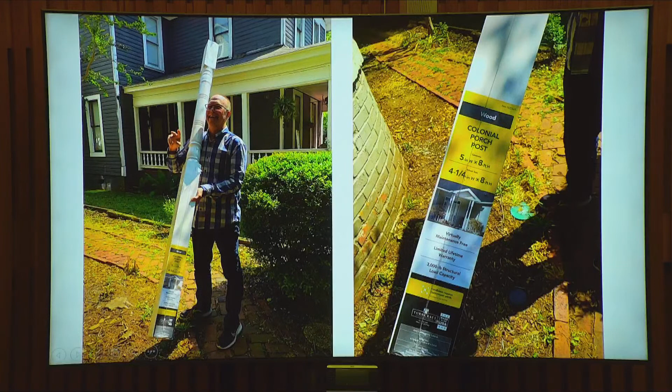You'll notice that the dimensions on these are going to be taller because of code, since porch railing heights are higher now. So on the older ones, the turning will start close to 28 to 30 inches, because that's where historically you would have your railing placed. And you'll see on the newer one, there's a lot more height here before it becomes turned. That's because when a new railing goes in on that second floor, it's going to be taller.

Front elevation porch columns.

Under findings, Mr. Pitzel had ordered new siding to match the exact siding that was on the house. Some of the porch columns on the residence, at the time work started, were fiberglass, so he had a mix of wood and fiberglass on his porch to begin with.

The commission has approved synthetic columns to replace severely damaged wood columns in the past, most recently at 714 Line. Columns where just the bases were damaged have traditionally had new bases built and inserted.

On the porch banisters and hand railings, the front porch railing was at the standard 28-inch height, which is what you find with historic railings. The new railing is 34.5 inches. The owner has stated he wants a taller railing because the historic railing does not meet code.

I talked to the head building inspector for the city to determine what was appropriate. He said because it's a historic building, he could put back the low 28-inch railing if he liked. If he wanted a taller railing, code is actually not what Mr. Pitzel built, which is 34.5. Code is 36, so the new railing built is too low to currently meet required code for new construction, and Mr. Pitzel is aware of that.

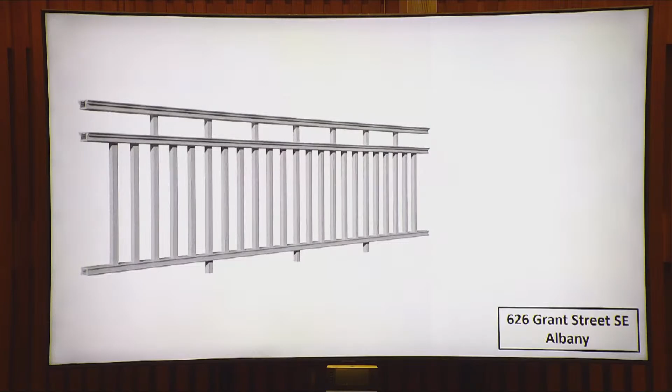So I would suggest, for clarity on this, breaking these COAs down into each individual component.

And we're going to start with the siding. So does the commission have any questions on that? Mr. Pitzel is here, so we'll have him come up front if you have questions for him.

Good afternoon, I'm Wendell Pitzel at 626 Grant. This is actually going to be my third COA. The first one was for the rain gutters, because I had water damage from lack of rain gutters, which is why the siding was so bad around the bottom of the house.

Caroline, have you seen the new siding? Does it match? Well, I don't know what was originally there. Oh, well, that would be this—okay, yeah, this is a sample of it. It has galvanized corkscrew-type nails, which I believe are probably a little bit more modern, but this was the siding that came off the house. I brought you a piece in case you need to see it. Do you want to go ahead and pass that down?

Absolutely, can you just send it down? We know it's gonna end with Bill because he's gonna want to look at it the longest. Yep, again, if you don't want to keep it for a souvenir. I might keep it—I have a whole library of building cards. I brought you some nails too. Oh, you want to see this one? Yes ma'am, that's what we're gonna be approving. Thanks to Literal Lumber, we had quite the time. I guess if that's not a separate piece—it's always fun at a lumber store. Well, the guy that does the milling quit the week before they were supposed to start our job. Oh sure, it was delay on delay.

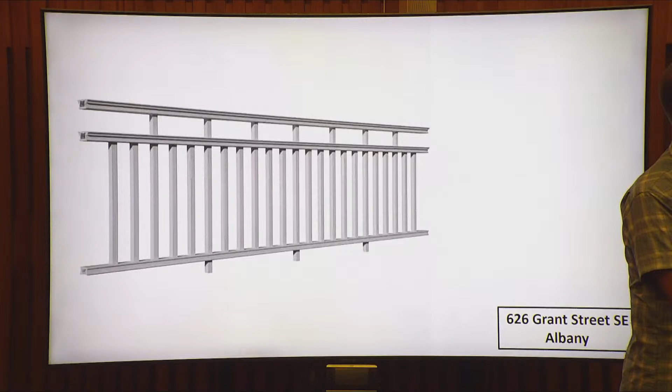Now, so, I would be comfortable with the 36-inch height, but with the more open at the top.

It doesn't have to meet exactly what we've approved in the past. There could be some discussion on design for that, but with the more open design, you could get the separation between 28 and 36. If we brought it up from the bottom, say of the spindles, so instead of putting it on top, if we raised the spindles up and put that piece underneath where it wouldn't be visible from the street, to raise it up to the 36.

You're talking about the whole thing coming up? No ma'am, I'm talking at the bottom of the image. You see where the supports are right there in the middle? Right, so that's basically a 2x4 at the bottom of my spindles. If I were to pull those spindles off, raise it up an additional 1.5 inches to get it to 36, and then put the spindles on top of that, you wouldn't see the bottom board from the street because of all the landscaping as it is.

It would raise that top railing up to the 36 inch, meeting my desire for a 36 inch safe rail for myself and my grandkids and visitors. And then, of course, putting the strip along for the 28 inch so that you could see where the historic side height would have been.

I want to make sure I've got this in my notes correct. So you're talking about taking the entire railing panel and just slowly shifting it up. There is a maximum space that has to be under that.

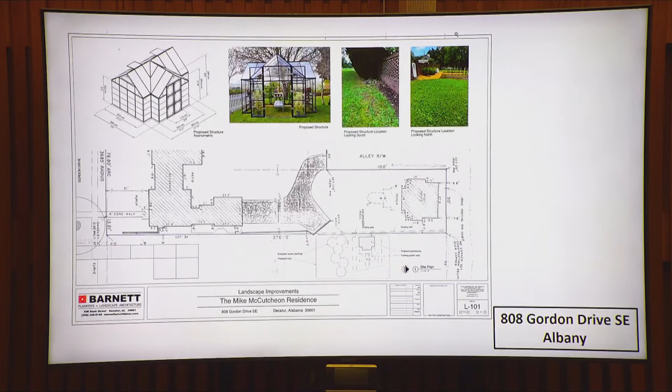I can make a motion that the greenhouse is accepted with the screening and landscaping as shown. Do you have a second? Second. All in favor? Aye. All right, I will let them know that it's been approved.

Next up is not a COA, it is a courtesy review for new construction. So typically with large additions and new constructions, we have the builder and the property owner meet with the commission just for level setting on expectations so that they're not burning a lot of design hours without understanding the standards for the district.

This is for a vacant lot on Jackson Street. We don't have many vacant lots in the district. It's on the corner of Jackson and Fourth. There is no address yet because there's no house there, so that's why I don't have an address on the paperwork. So this is the lot as standing on the sidewalks. Oops, and I have Grant Street on there, my apologies.

And they did have initial drawings prepared for what they were sort of proposing. This is a 1.5-story craftsman style building. And that is the front elevation. So I'm going to come back to this and I'll read.

So this is the courtesy review that they're requesting, per Decatur's Design Review Standards for new construction, section 19. And I put a copy of the full guidelines in your packet because it's quite lengthy. For height, it is asking that the height of the building meet those adjacent and neighboring to it.

And you can see all the buildings down the street are full 2-story, and across the street we just have sort of one catty corner. So it does not appear to meet that standard.

For proportions, for most of the house, it does not appear to meet those standards because the houses adjacent and neighboring are 2-story and L-shaped, cross gable or rectangular with side gable or even hipped front.

So it's different. For rhythm, and that would include fenestration and porch columns, the large multi-light picture windows are not historically found within the district, and there are none on adjacent houses. That's like a ranch style design detail. The front door is a contemporary 6-panel colonial revival.

Setbacks, we don't have that data yet, so they would need a full site plan showing setbacks to keep within, and a landscape plan for full submittal.

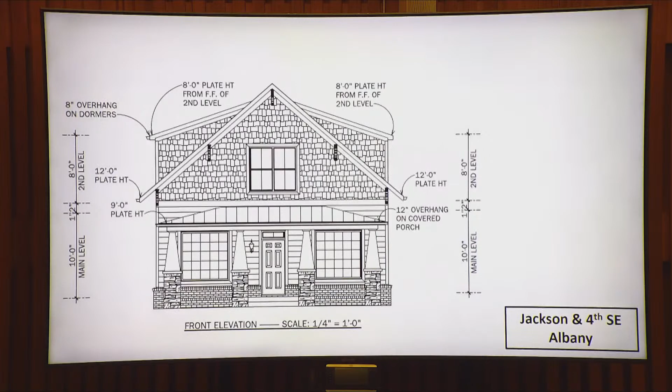Those are the neighboring houses. And I believe, there we go. That is the builder, that is the property owner. So if you have questions, we're gonna have them come to the front. You can sort of walk them through what you would like to see for the next time they come in with a full packet.

Hi, I'm Keith and this is Peyton. And you're the designer? You're the owner or the designer? I'm the owner of the property and he's the builder.

I will say Peyton is very passionate about this neighborhood. He very much, Keith, he very much is concerned because he will call me about things on the street that we have no control over, but I know they concern all of you in terms of parking and trucks and things that he would love to see. So I have told him those are conversations for the police department and council, but we very appreciative and see many of the same challenges that you have highlighted.

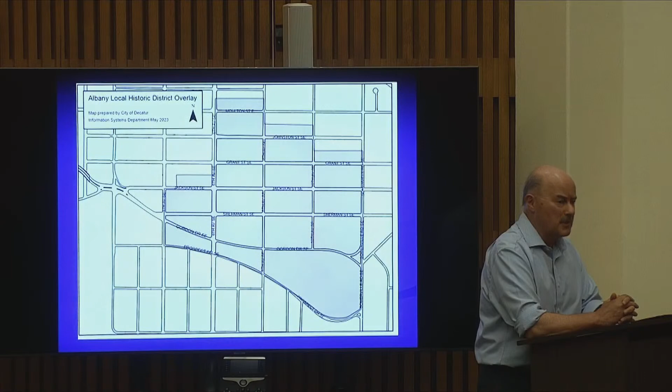So you will find in the draft that there are some maps that were created for the two historic districts. Those were created by your GIS folks here, and we appreciate their putting these maps together. So you have Old Decatur and Albany, and I think those are going to be a little bit easier to read in your guidelines.

And we also detail each primary architectural style that you have in the two districts. And you will see with the photographs that we include, we also included little bubbles with the numbers to outline and highlight the details. So each of the architectural styles has that to assist property owners in identifying the characteristics and the details of the particular style.

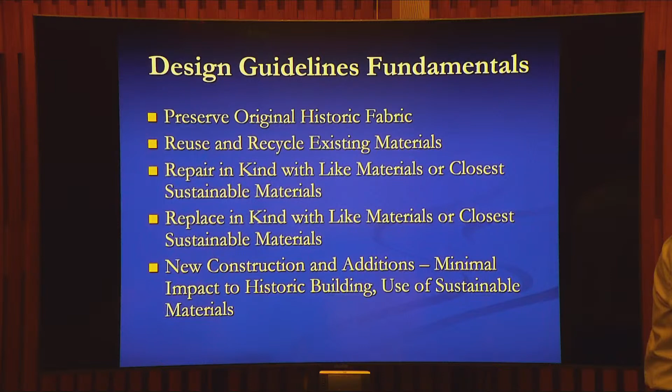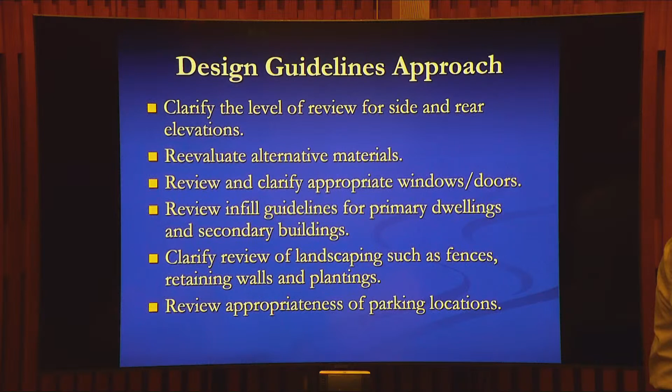So one of the things as we looked at the guidelines for Decatur was clarifying the level of review for side and rear elevations, reevaluating alternative materials, and reviewing and clarifying appropriate windows and doors. You talk about the double hung windows that are in the great majority of your houses in the historic districts. Also reviewing infill guidelines for primary dwellings and secondary buildings like garages, clarifying the review of landscaping through fences, retaining walls, and plantings, and reviewing appropriateness of parking locations. Those are some of the things that stood out for us as we went through the design guideline elements.

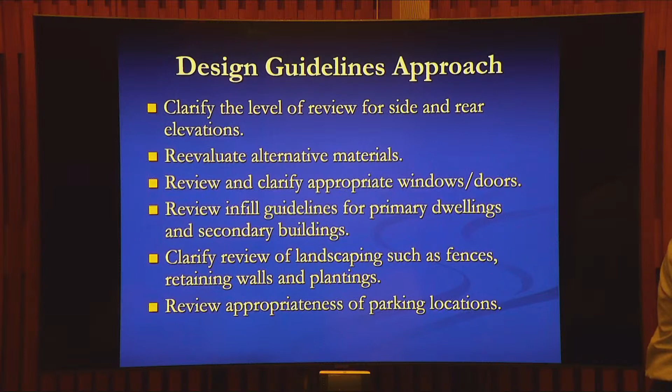Next. So again, just looking at public versus private space, rear elevations having more leeway, more flexibility in terms of additions there, porch designs there - just something to consider that's not in the visual aspects of the public right-of-way.

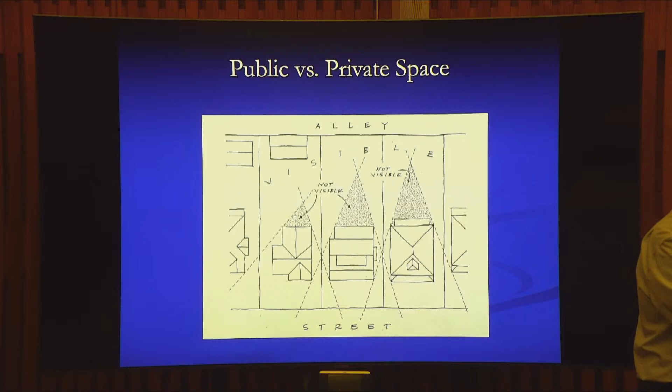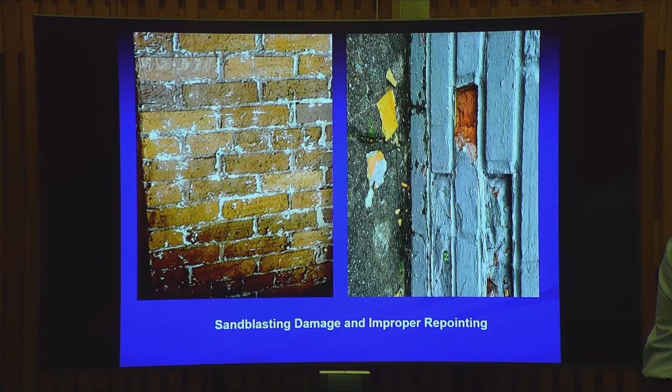Certainly for masonry, I think most commissions over the years, design review boards, recognize that abrasive cleaning of brick is very detrimental. That's very clear in your guidelines, and we just reiterate that masonry walls should not be sandblasted. You can see the damage that's happened in this particular property. Next.

Where the brick simply erodes because the mortar is harder, the repointing was done inappropriately, and the mortar joints are there, but your brick is deteriorating. This leads again to spalling and cracking, and in this particular case you can see the inappropriate mortar that's flush with the brick itself - it's not raked or recessed.

Preserve and maintain original wood siding, and we had that sort of discussion in one of your reviews earlier this afternoon. Again, just try to keep as much of the original siding as possible, and where it can't be repaired, match it as closely as you can.

Same thing with all the other design elements of wood, like your wood shingles. You have many examples of fish scale shingles and hexagonal butt shingles in your gable fields and upper facades in the two historic districts.

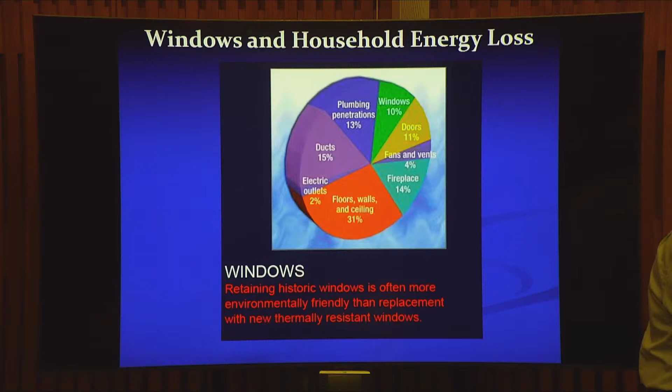What we find, through lots of studies done over the last 20 years, is that preserving and maintaining your old growth wood window and putting a storm window over it gives you about as much thermal efficiency as the high-end vinyl sash windows, double pane sash windows.

The numbers on this are probably a little old, but this is an illustration showing what the payback's going to be, and you're going to have your house for like 40 years to get enough return on your investment of replacing all your old growth wood windows and adding vinyl sash or aluminum sash back.

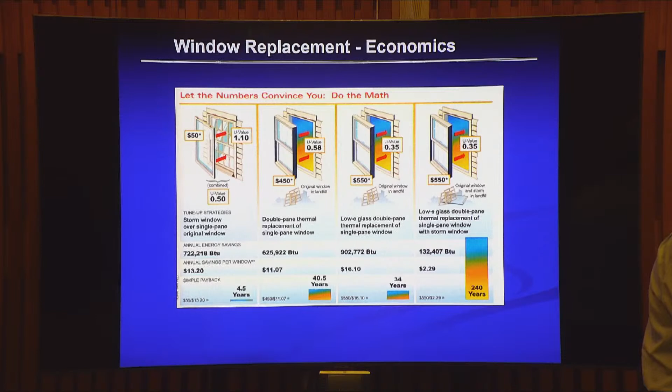Historic wood windows with added storm and weather stripping equal the U value of most replacement windows. You get much better payback through weatherizing your historic wood windows, and it can take 30 to 40 plus years to recoup the cost of replacement windows.

Usually we also find the life expectancy of vinyl sash windows is maybe 15 to 20 years, so they're not going to last 30 to 40 years anyway.

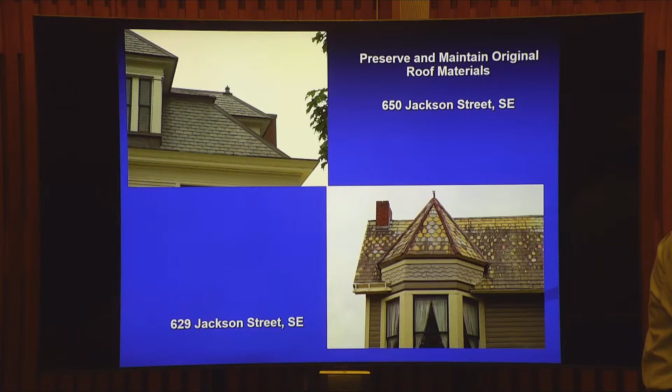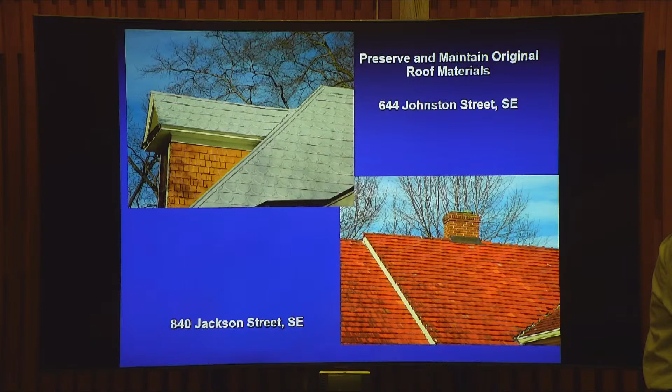You really don't have too many houses with metal roofs, the standing seam metal roof, crimped roofs. Unfortunately, we do see inappropriate metal roofs being requested in historic districts where the crimping and spacing simply is not in keeping with a traditional standing seam metal roof design. So if you start getting more requests for metal roofs to replace existing fiberglass or asphalt shingle roofs, make sure you follow the traditional spacing and crimping designs, like you see in the next slide. Those are new roof materials, but they are appropriate in terms of matching traditional designs.

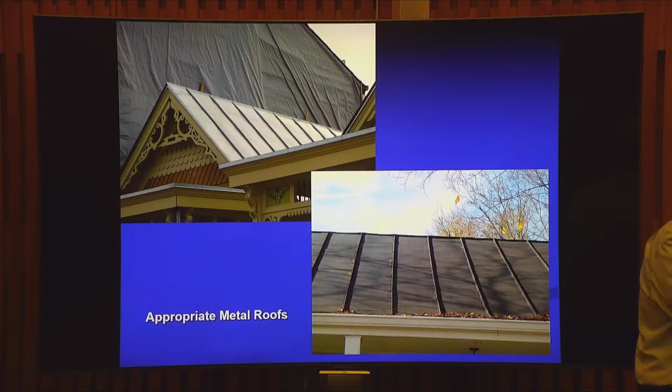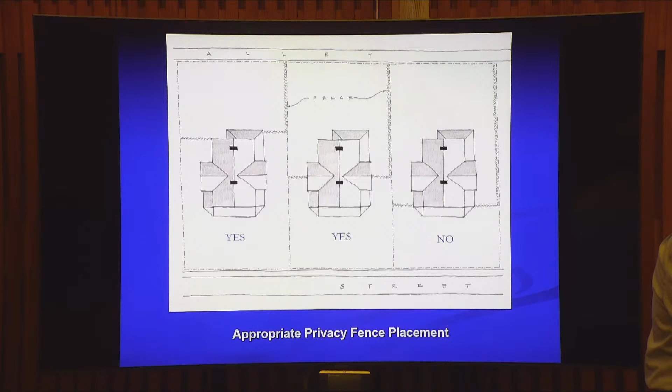This is an example of appropriate privacy fence placement. We have this illustration in your guidelines where you don't want the privacy fence way out next to your front porch or in the same plane as the front of the house, but pulled back at least to halfway of the depth of the house, and preferably even all the way back to the rear of the house. So we're trying to clarify that as much as we can for your privacy fences, and this shows appropriate placement and height of your fences at the rear of these two houses - again, just the right kind of location and height.

Not appropriate are the non-traditional wall materials we see at sidewalk level, like split face block or oversized brick. These are just not traditional materials that you ever really had in the historic district. On the rear elevation they may be fine, but right by the street, not appropriate.

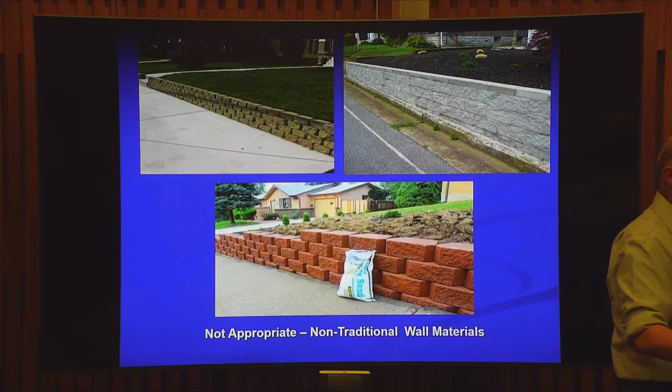We also include some illustrations and designs of appropriate ADA compliance. You don't have that many dwellings that are used for offices.

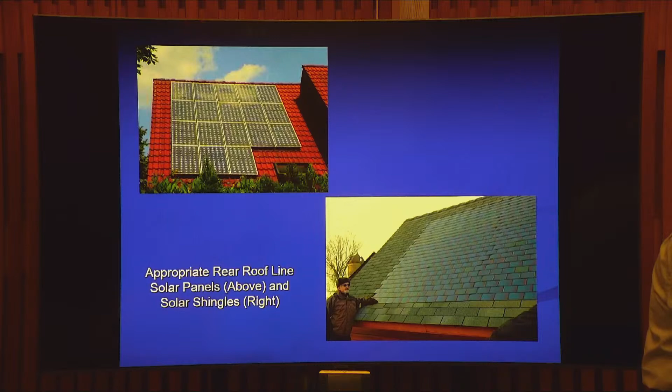Within that, we look at solar panels and the addition of solar panels on historic houses. In some cases I've seen these panels located in a rear yard as freestanding units. Also you see them on rear roof lines. You have both solar panels and solar shingles, and you may start seeing more applications for these kinds of materials. We're still waiting to see if these solar shingles, like you see here on the right, get better in terms of their appearance, and maybe at some point they will really look like a traditional asphalt or fiberglass shingle roof, but they're solar shingles and can really assist with energy conservation.

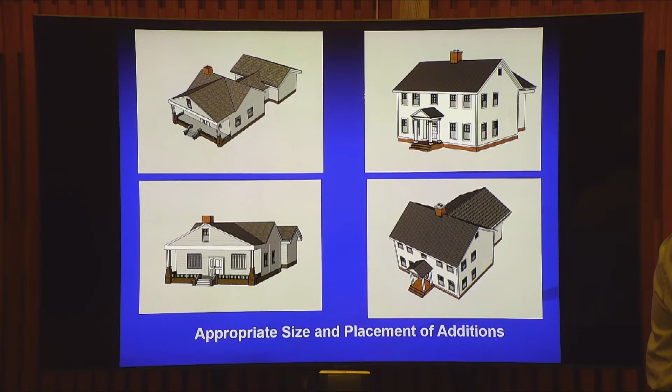These are just some of the illustrations in the guidelines we prepared for you, showing the right location, size, and scale.